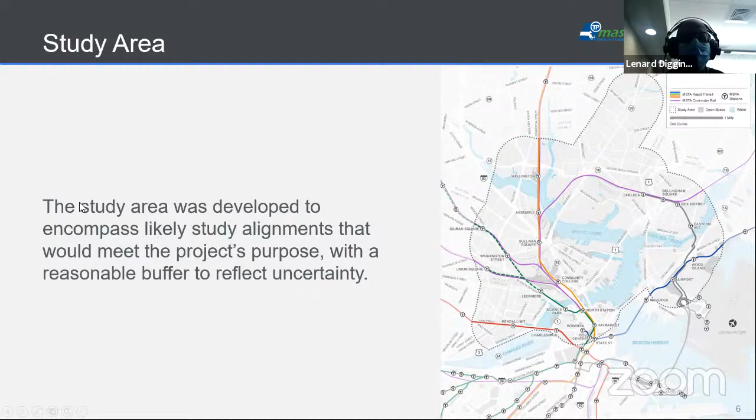Sorry about that. On your previous slide, I know sometimes there are questions I get to ask. The first two bullet points, I'm not understanding what you mean by competitive, because when I sum it up myself, I'm not clear on why the second statement isn't to be expected. So what do you mean by not competitive with driving?

For the purposes of this study, competitiveness is defined as a similar travel time between being on a bus versus being in a car. So effectively, there is a lot of bus service in this area, but it does not get you from point A to point B nearly as quickly as being in a car often will. Gotcha, I knew it was something fundamental I just didn't appreciate. Thank you very much.

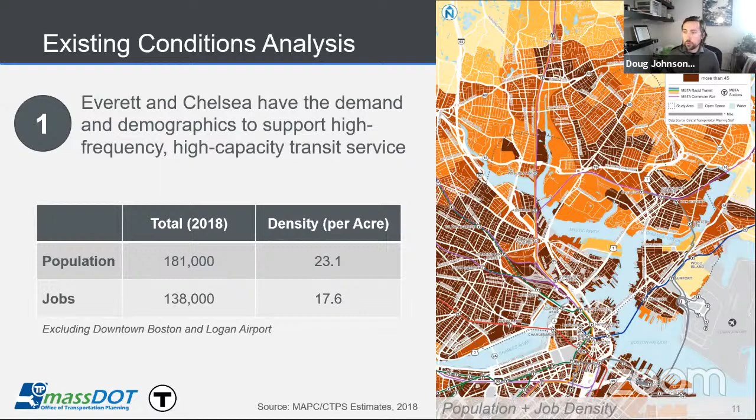Speaking to demographics, our study area has more transit critical residents than the inner core overall. It does vary a lot across the study area, as there isn't a uniformity of urban form. It's a large study area that encompasses 5 different municipalities, so that's why there's so much

Variation. But for this project, similar to the Forging Ahead initiative at the T, transit critical is defined as low-income households, households of color, and households with low or zero personal vehicles. Low is defined as less cars than people in a household. So those 3 characteristics make up what is referred to as transit critical populations.

So there is a lot of variability, but transit critical populations are concentrated in the parts of Chelsea and Everett that our study area covers.

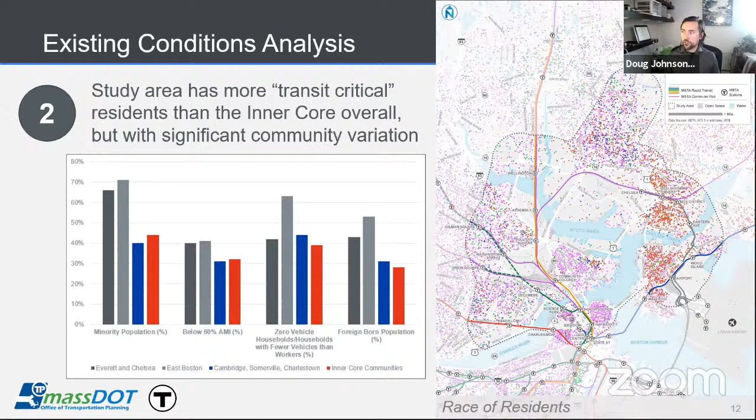Everett residents have less access to regional activity centers than residents in adjacent communities, and that's mostly a result of the way the transit network is currently operating or designed.

And you can't make it to downtown Boston within 30 minutes either. Mostly that being a function of the fact that you would have to take a bus down Broadway and then transfer at Sullivan Square. So despite being geographically really close to those places on public transit, it can take a while to access those regional job centers.

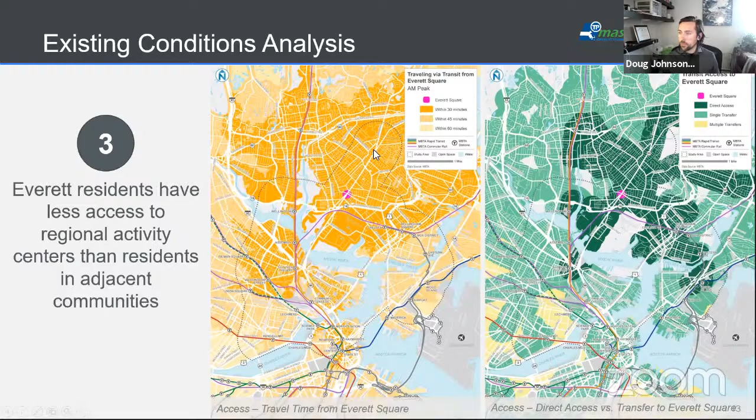And so this is a function of both how long a bus will be stuck in traffic, but also the number of passengers on it. So if a route has more passengers, then there's more passenger minutes of delay. That's a measure of how much time is essentially being lost to delay. So it's not normalized by ridership, but you can still get a sense of where new things like bus lanes or improvements to service or transit signal priority could make a huge difference for a lot of passengers and have the most impact in reducing delay.

And you can see that, to me at least, the Broadway corridor really stands out here, as well as the area around Sullivan Square. And then North Washington Street Bridge, but of course, the North Washington Street Bridge is being reconstructed, and we'll have a southbound bus lane, which will help improve travel time for folks on the 111 and the other buses that go over that bridge.

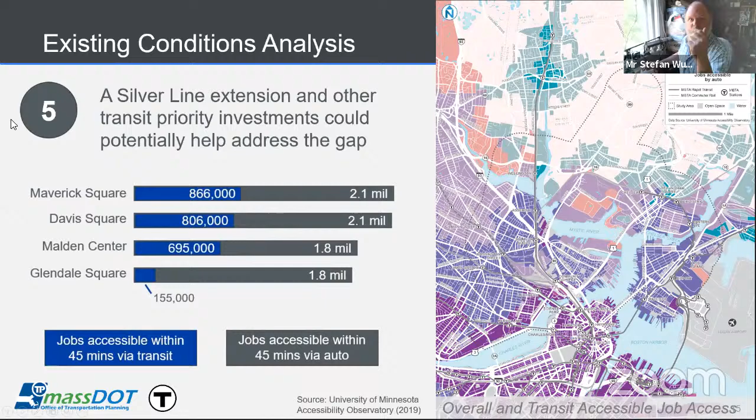Please feel free. Yeah, I'll jump in quickly, and if you want to hold this off till later in the presentation - would you characterize the goal of this to say whether or not the extension of the Silver Line is a good idea, or is the goal to say what is the best way to provide additional public transportation to this area?

I'm asking in a funny way, are you limited in this study to basically saying thumbs up, thumbs down on Silver Line, or could you say Silver Line would be good, but extending the Orange Line or something else entirely would be great? I'm trying to get a sense of how much freedom you have beyond just asking the black or white question of more Silver Line good, more Silver Line bad.

Sure. The way I'd describe this is it's asking the question: what are the existing limitations within the study area? Is there a way that extending the Silver Line could address that? And what other improvements to bus service could also help achieve those goals? So we're not looking beyond various forms of bus service. We're not looking at things like a potential Orange Line. This is more focused on the Silver Line, but we anticipate there will be recommendations that could improve bus service in general, not necessarily limited just to the Silver Line.

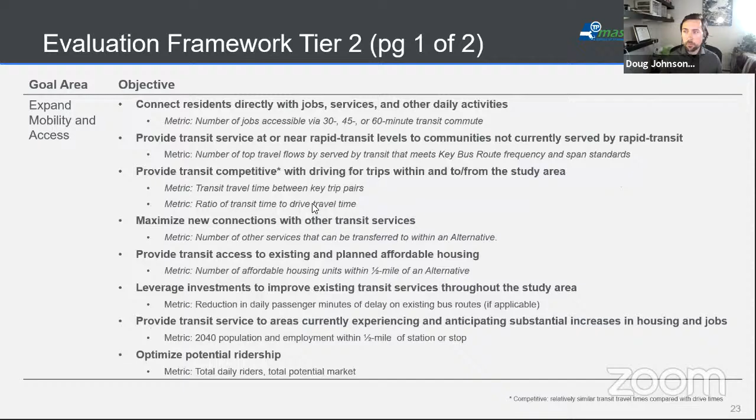The objectives are all the same, for tier 1 and tier 2. It's just the metrics that change based on whether we're analyzing individual segments or full routes.

For actual alignments, we've broken up our study area into 4 sections. Section 1 is Chelsea and Everett. Section 2 is Broadway in Everett, or to put it more broadly, Everett to the Orange Line. Section 3 is the Orange Line to Kendall, whether from Wellington or Sullivan. And Section 4 is the Orange Line to Boston.

But there is also this piece from Lechmere into downtown Boston. Essentially, if you have a route that has made it over into Lechmere, theoretically, you could continue into downtown. But as we go through our analysis, we'll see if in any of our alternatives it would make sense to include that, because you will have the Green Line connection there.

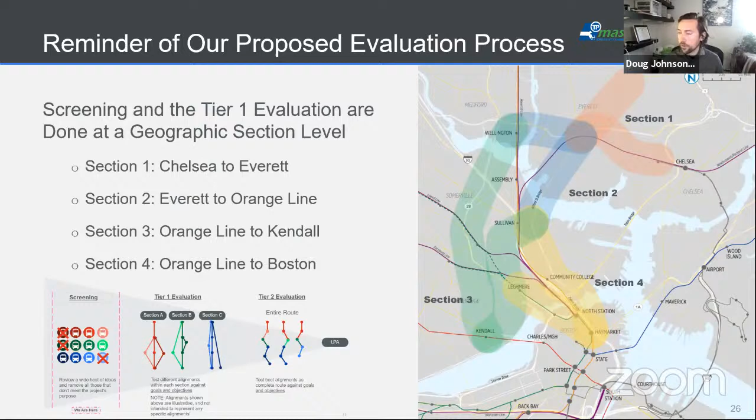So that's our evaluation framework again. We're at the start of this tier 1 process. We've identified the different alignments, and we are going to be analyzing them. Here they are broken up by section.

This is section 1, the terminal of the SL3 in Chelsea, where this green dot is, to Broadway in Everett. The solid line here is what was recommended by the Lower Mystic Regional Working Group report, and the dotted lines are other routes we have identified for consideration.

The Lower Mystic Regional Working Group report recommended going along the commuter rail right of way up 2nd Street and then onto Route 16. They also proposed a separate service coming down Broadway in Everett.

They had it coming from Glendale Square, which is here, but we recognize that if there is a service that originates on Broadway and goes up and down Broadway, it would need a place to turn around. This park up here, a triangular park with roads forming a triangle around it, seems like a natural place to have a service turn around if there is to be a service just serving that corridor, and then beyond from there.

So other options for connecting over to Broadway in Everett: you can go up Everett Ave to Route 16, you could just continue right up 2nd Street if you're already on it, or you could divert off 2nd Street up Spring Street to Chelsea Street, or potentially continue along the commuter rail right of way into Sweetser Circle.

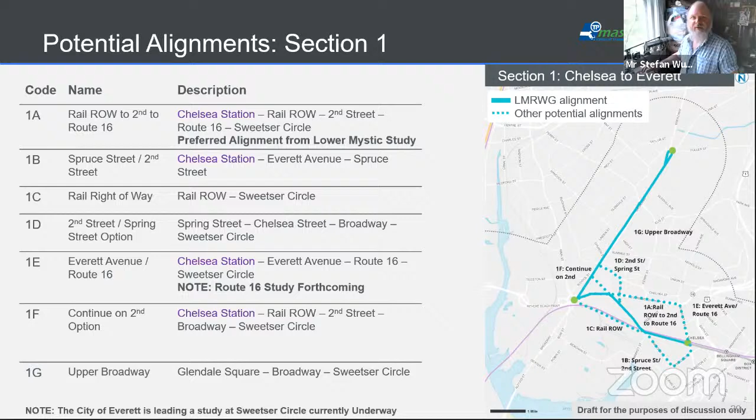Sounds good, all right, so we'll move on to section 2. This is Everett to the Orange Line. The Lower Mystic Regional Working Group report recommended using Lower Broadway and getting into Sullivan Square.

You could also potentially, if you were going along the commuter rail right of way from section 1, continue along the commuter rail right of way to the back of the casino. Or if you want to connect to Wellington rather than Sullivan, if you're coming down Broadway, you could get onto Route 16, or if you're already on Route 16, you could continue on Route 16 to get into Wellington.

But we have a lot of concerns about the engineering feasibility of doing something like that, and the way it would interact with the existing commuter rail and Orange Line tracks. We also have concerns about the ability to permit something like that, because typically in the permitting process, if there's a less impactful alternative, it's really difficult to get approval for the alternative with significant environmental impact. So we believe it'd be really difficult to get a permit for that when you could potentially use the Alfred Street Bridge.

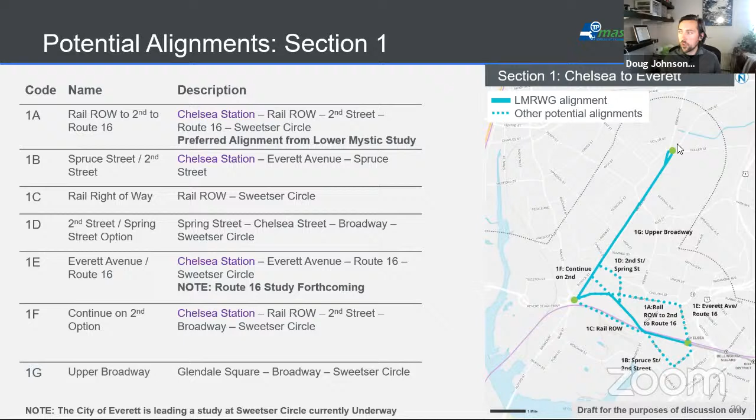Carl's asking, could you just go back to section 1 so we can see the map again? Oh sure, he's able to see the screen share now. Sure, thanks. Yeah, so Carl, this is section 1. The solid line is the Lower Mystic Working Group recommendation. Got it. Dashed line is us. Yep, got it. Okay, thank you.

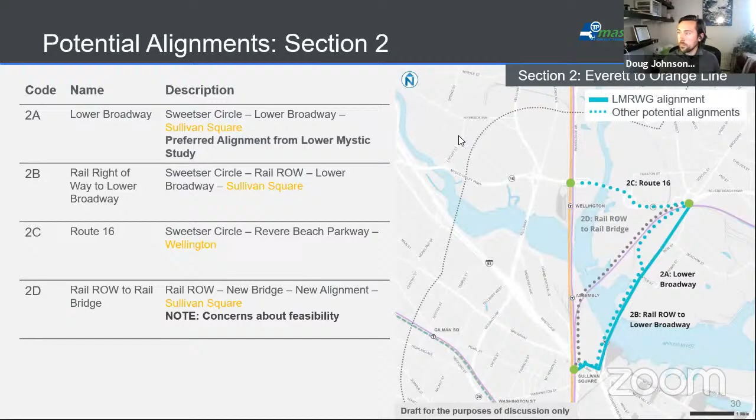So that was section 2. Section 3, the Orange Line to Kendall. This is where it starts to really open up in terms of what the options are. The Lower Mystic Regional Working Group report recommended going along Washington Street and down Inner Belt Road and over what would need to be a new bridge over the commuter rail tracks to get into North Point, then to Lechmere, and then down First Street, Binney, and Third Street into Kendall. So that was the route they proposed.

We are taking a look at that and the feasibility of constructing a bridge from Inner Belt Road into North Point. That idea has been recommended by several studies in the past, but conditions in that area have significantly changed due to the extension of the Green Line. So based on the Green Line extension plans, we are looking at the feasibility of building a bridge through there and what exactly it would take.

Other options include going down Washington Street to Route 28, or McGrath, into Lechmere. Of course, if you connected to Wellington from Section 2, theoretically you could continue from Wellington on down the Fellsway and all the way down 28 to Lechmere.

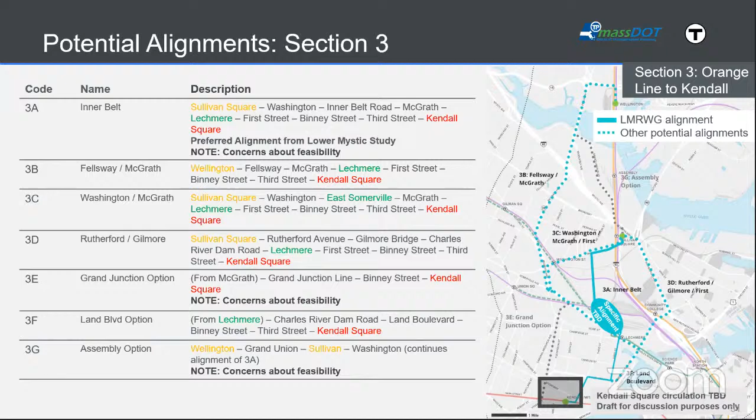Other options on here are you can potentially go to Rutherford and Gilmore to First Street, or tying to Lechmere. The other route in gray is the Grand Junction right of way. We believe that will be screened out because the space within that right of way is being explored as a multi-use path along the existing rail tracks, and there wouldn't be enough room in addition to those to have a busway through there. The exact circulation in Kendall Square is still to be determined. We're taking a look.

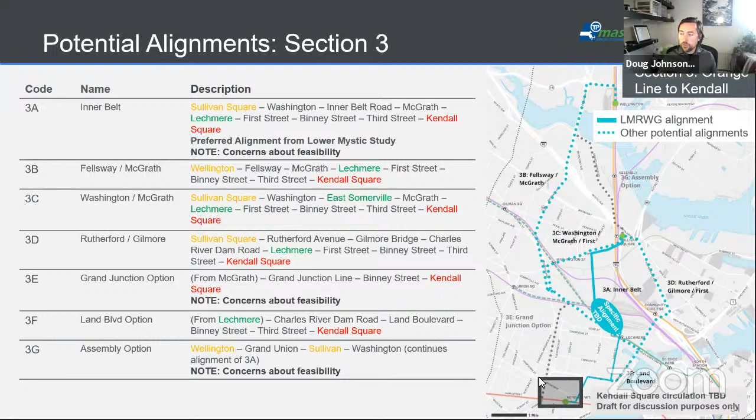And then Section 4, this is a little more simple. If you're trying to connect into downtown from Sullivan, you can do Rutherford Ave to North Washington Street. And if you've made it over to Lechmere and want to connect into downtown, you do the Museum of Science Bridge. But similarly to Kendall Square, the circulation and terminals in downtown are to be determined. We're figuring that out now as we're at the beginning of our Tier 1 analysis to see what would make sense through there and what should be included in our analysis.

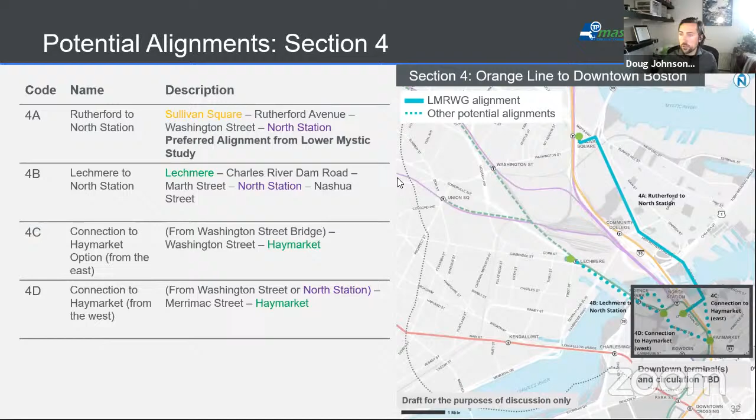And then this is basically the end of the presentation. Our next steps are to finalize our goals, objectives, and metrics. We're just wrapping up, refining those so that we can start that analysis. And we will then complete our screening process and do the Tier 1 evaluation, and then have our next public meeting at the end of the summer or beginning of fall of this year.

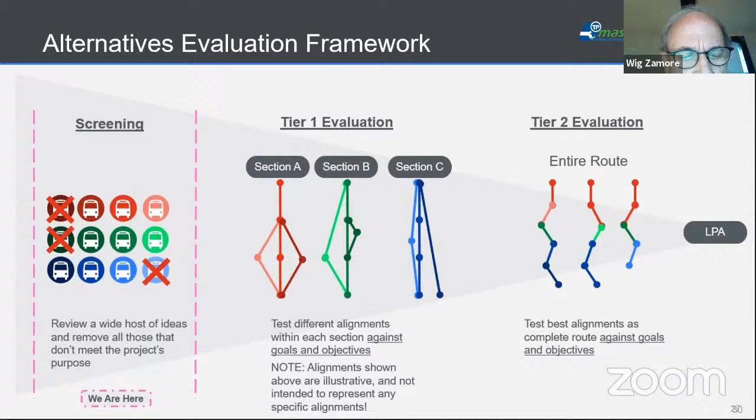And I would just comment an interesting fact that I didn't anticipate when MGB did their analysis for the headquarters and computer and finance and phone functions, which they handle at Assembly Square for the whole group.

The Orange Line was their key transit line. I was surprised by that. I expected the Red Line might be, given its prominence with the research universities. But they already had, by that decision point, noticed that their population was really based on the Orange Line. That speaks to the cluster you got the question about in Malden. People may not realize the extent to which people who are not super highly paid but are educated and part of the research economy discovered that on their own and used that Orange Line function up to Malden quite efficiently, which is terrific. Good for Malden, and I appreciate it.

Do you have back of the envelope? I know your key analyses will be done later, but do you have back of the envelope on daily ridership we're looking at here? No.

Okay, so I want to make one other comment, and then I'll come back to that, and then I'll stop because other people probably ask questions.

It's not a complaint about you, but it drives me crazy that people use greenhouse gases when black carbon is 3,000 times as potent as CO2, and transportation emits an awfully large percentage of the total black carbon in the United States, including in Massachusetts. To speak about greenhouse gases and let that allow you to mathematically not count black carbon is really bad climate math. That's not on you. I just wanted to bring that up because greenhouse gases is the term of art most people use, but climate scientists all use climate pollutant as the term of art, not greenhouse gases. It's mostly people inside professions or in politics who use greenhouse gases at this stage, but there are no climate scientists who use that.

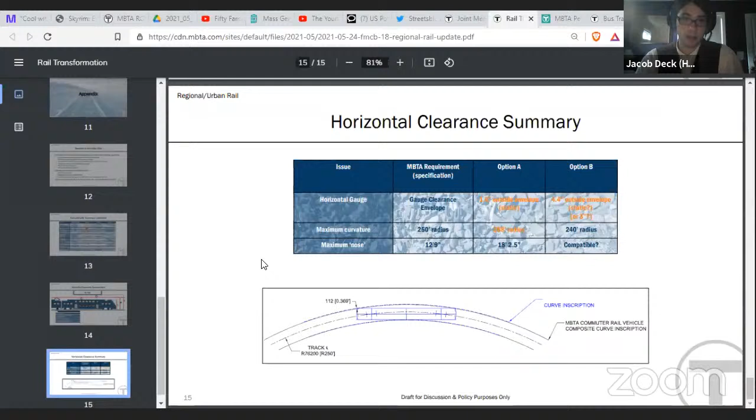So it seems like, yeah, this is the summary for what they want to use. It seems like, however, it requires significant modifications - definitely a strike against the KISS units. So it's quite probable that if we end up piloting or procuring EMUs, we might end up with the NJT Alstom multi-levels.

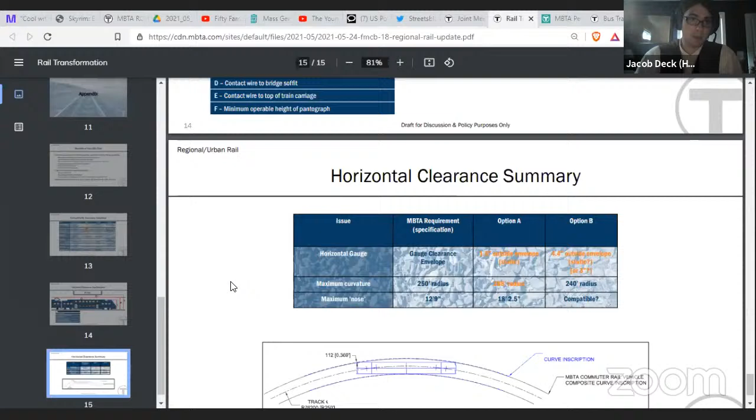Jacob, thank you for giving us that. I personally hadn't had a chance to even pull up the FMCB page since it happened yesterday, so that was an excellent summary of what is hot off the press.

Thank you. And these things match really well with larger and larger offshore wind contracts that are being let by the state.

There's also, I looked on the FMCB slide decks - it looks like there's some South Coast Rail updates as well. I haven't reviewed those though, so I don't think I should present on them.